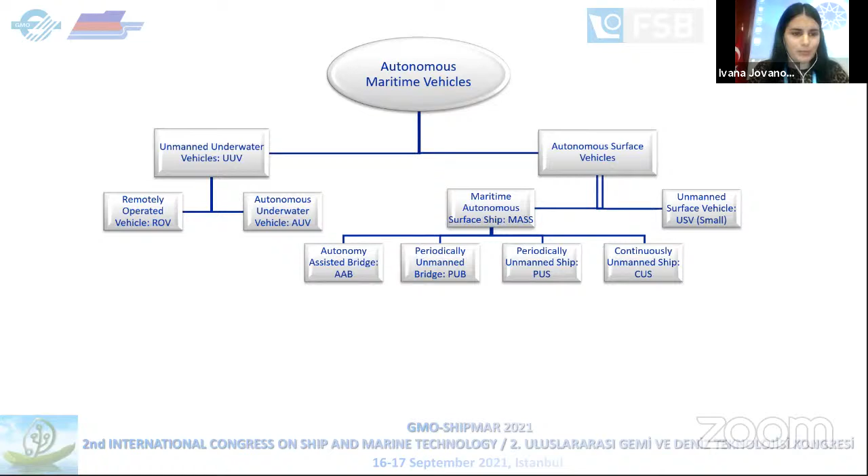Autonomous maritime vehicles are classified into unmanned underwater vehicles and autonomous surface vehicles. Unmanned underwater vehicles are further divided into remotely operated vehicles and autonomous underwater vehicles. Here we see an example of an autonomous underwater vehicle used for oil platform inspections. Autonomous surface vehicles are divided into maritime autonomous surface ships and unmanned surface vehicles. Here is an unmanned surface vehicle used as a research platform.

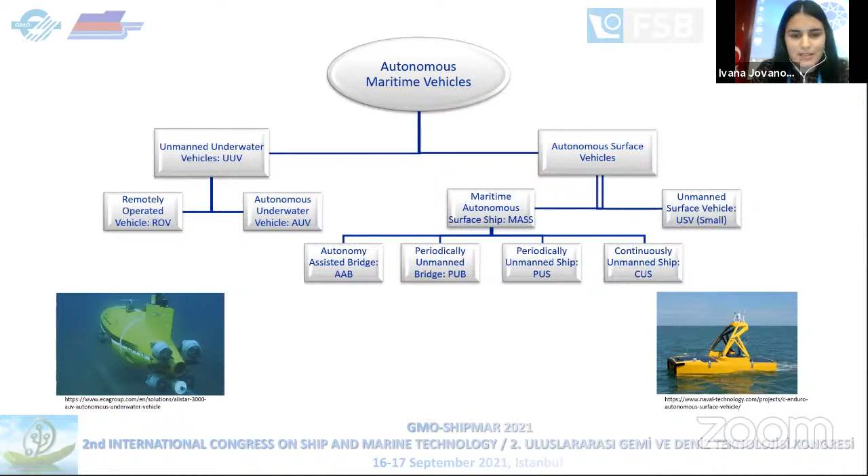Maritime autonomous surface ships is commonly used as the term for autonomous ship, and it is further divided into autonomy-assisted bridge, periodically unmanned bridge, periodically unmanned ship, and continuously unmanned ship. Here is a picture of Yara Birkeland, a fully autonomous and fully electric ship built in Norway.

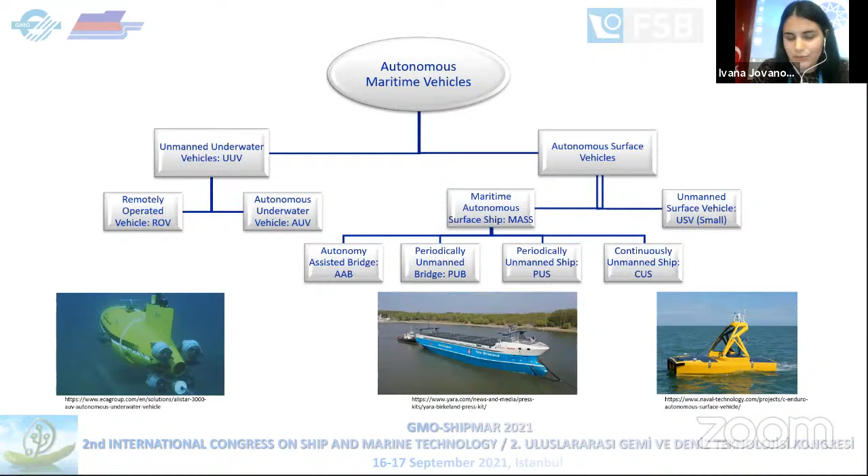The driving force for the development of unmanned and autonomous ships lies within the opportunity of cost savings by fuel reduction and lowering operating and voyage costs; safer waterborne transport by eliminating human error, which is responsible for more than 60% of maritime accidents; greener shipping by reducing fuel consumption and enabling implementation of renewable energy sources and alternative fuels; a more competitive industry through opportunity to grow in size and volume; and new personnel ashore by creating engaging and exciting maritime jobs.

The International Maritime Organization has recently defined 4 autonomy degrees for maritime autonomous surface ships. First degree are ships with automated processes and decision support, where seafarers are on board to operate and control shipboard systems and functions.

Degrees 2 and 3 are remotely controlled ships from a shore control center. In degree 2 ships, crew are still on board, ready to take action if needed, but in degree 3 ships there is no crew on board. Degree 4 is a fully autonomous ship, which has an operating system able to make decisions and determine actions by itself.

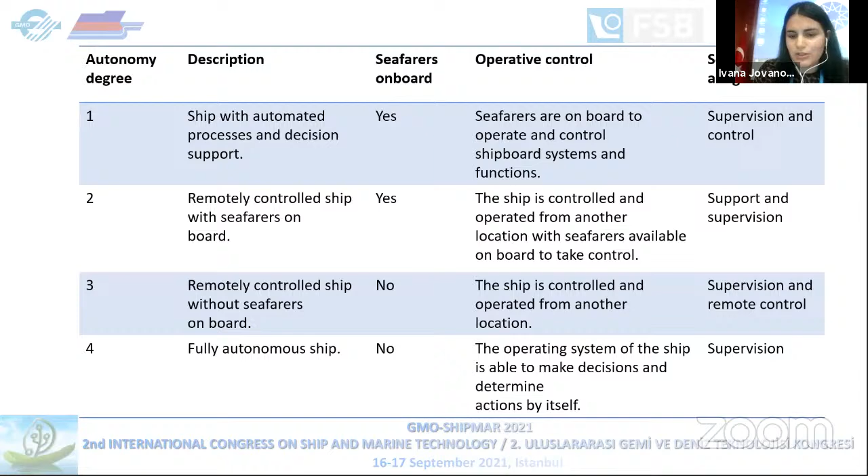A crucial part of every autonomous ship is the guidance, navigation, and control system, as well as a variety of sensors that enable situational awareness. Reliable communication is also crucial. Depending on size and usage, it can be an internet connection, antenna, or satellite. Also needed is a ground station, which depending on size and usage can be a mobile device, laptop, another ship, or in the case of a merchant autonomous vessel, a shore control center.

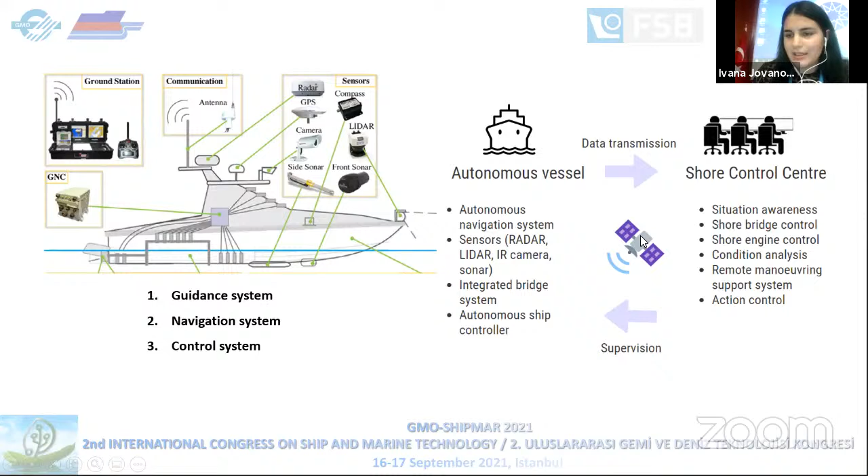Here we can see the relationship between the autonomous vessel and the shore control center. The autonomous vessel transmits data through satellite, and the shore control center offers supervision and support.

In this study, a cost model is used. Ship costs are divided into capital costs, related to ship purchase; operating costs, related to crew number, wages, storage, insurance, and administration; and voyage costs, which depend on the typical route. These costs are related to fuel consumption, fuel price, speed, canal dues, port charges, and emission costs.

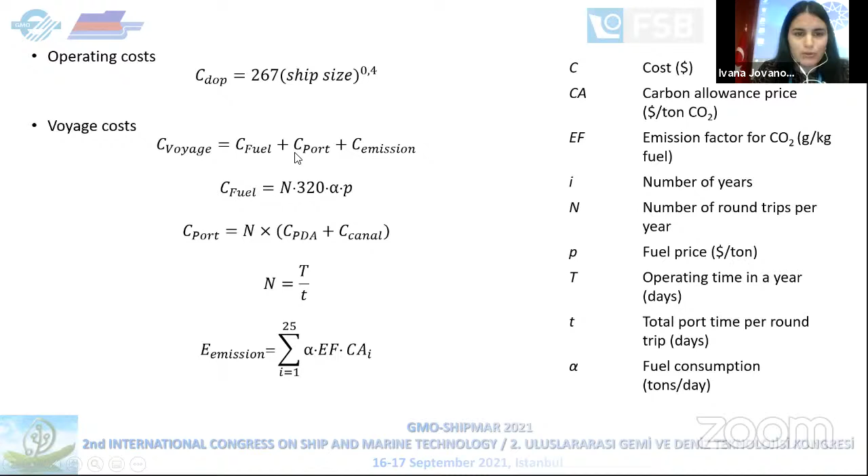Here we can see the equations used for calculating all costs. Daily operating costs are calculated in relation to ship size, and voyage costs are divided into fuel costs, port costs, and emission costs.

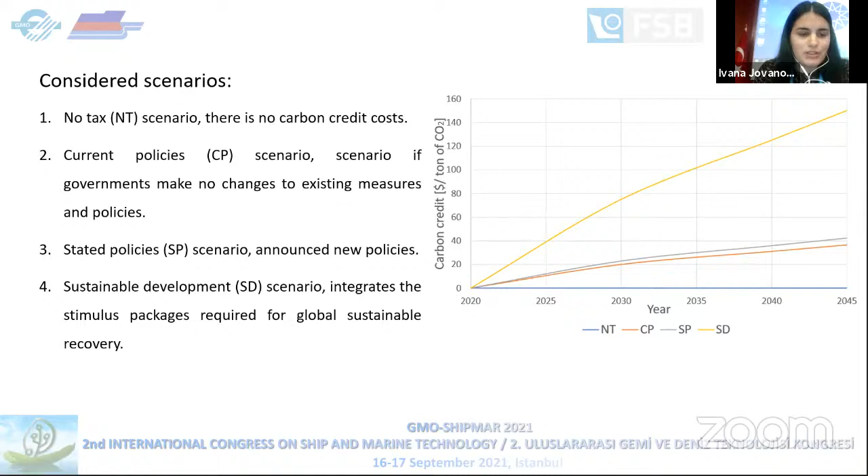In this study, emission costs are calculated for 4 different scenarios. The first is a no-tax scenario. The second is a current policy scenario. The third is a stated policy scenario, and the fourth is a sustainable development scenario, which is required for global sustainable recovery.

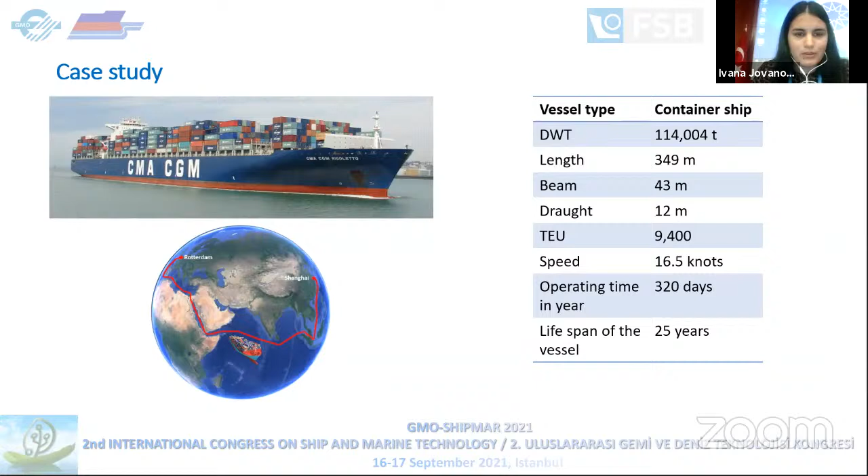In this case study, a container vessel is used. Costs are calculated for a specific route from Rotterdam to Shanghai. The operating time of this ship is 320 days a year, and costs are calculated for a lifespan of 25 years. Firstly, costs are calculated for a conventional container vessel, and then, using research from the European project MUNIN, costs are calculated for an autonomous container vessel. It is assumed that the autonomous vessel is as safe as the conventional one.

Here we can see the results. Here is a diagram of daily cost per container for all 4 scenarios: the first is for conventional, then next to it is for autonomous ship. It can be seen that in all 4 cases, autonomous ship has lower costs, with the most savings for the sustainable development scenario.

Here is sensitivity analysis also, which shows that fuel costs influence total costs the most.

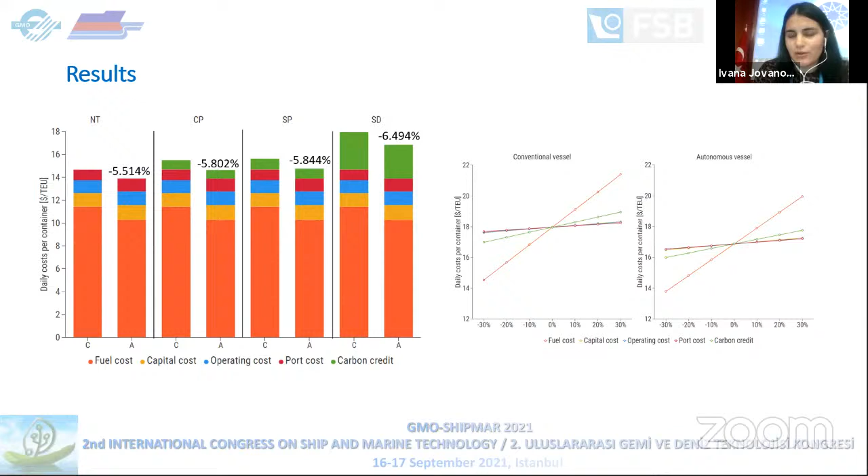In conclusion, with stricter emission tax scenarios, the difference in cost between a conventional and autonomous vessel becomes more significant. Economies of scale occur in daily costs per container. Autonomous vessels have lower fuel consumption, resulting in lower fuel and emission costs. Operating costs decrease in autonomous shipping, and port and capital costs increase, but total costs are lower for autonomous vessels.

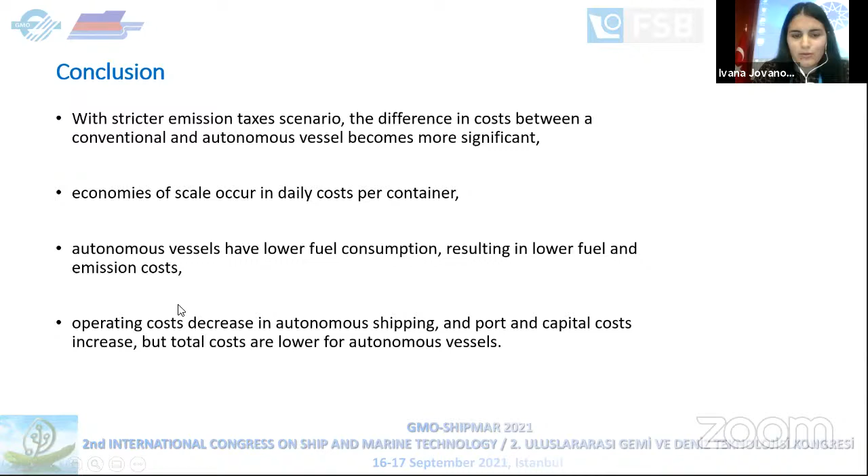Thank you for your attention, and I'm happy to answer your questions.

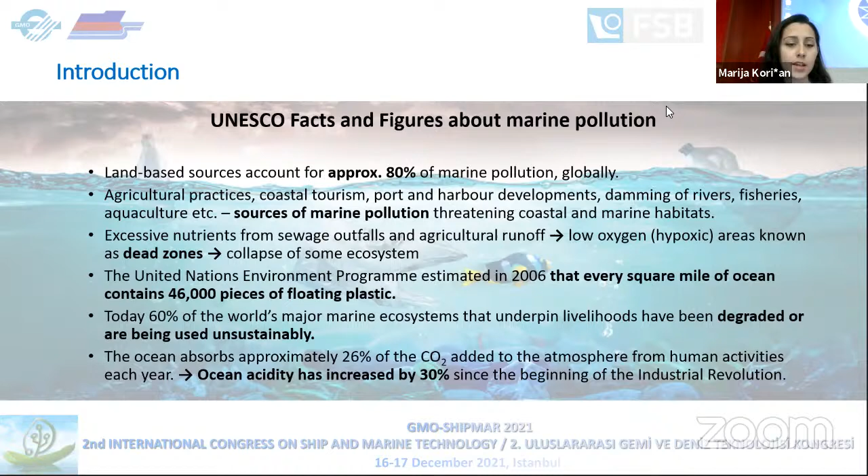The United Nations Environment Program estimated in 2006 that every square mile of ocean contains 46,000 pieces of floating plastic. Today, 60% of the world's major marine ecosystems have been degraded or are being used unsustainably. The ocean absorbs approximately 26% of the CO2 added to the atmosphere from human activities each year, and this causes an increase in ocean acidity by 30%.

There are different types of marine pollution issues. Microplastics are the most mentioned one in the general public; they are harmful for marine organisms, causing problems in the digestive tracts and altering feeding behavior, reducing growth and reproduction. Different chemical anomalies from toxic waste and dissolution of chemical compounds, such as from antifouling paints, fishing nets, and biocides, enter the food chain and can directly affect human health and result in human casualties.

Major oil spills are a rare event nowadays, but when released, they cause great environmental disasters. Thanks to a variety of technological and regulatory prevention measures, there is a significant reduction in spillage, but the risk of significant damage remains. Atmospheric emissions are a highly investigated pollution problem, especially in land transport. The emissions are mainly nitrogen oxides, sulfur oxides, and carbon oxides that the ocean absorbs, resulting in an increase of acidification level and global warming.

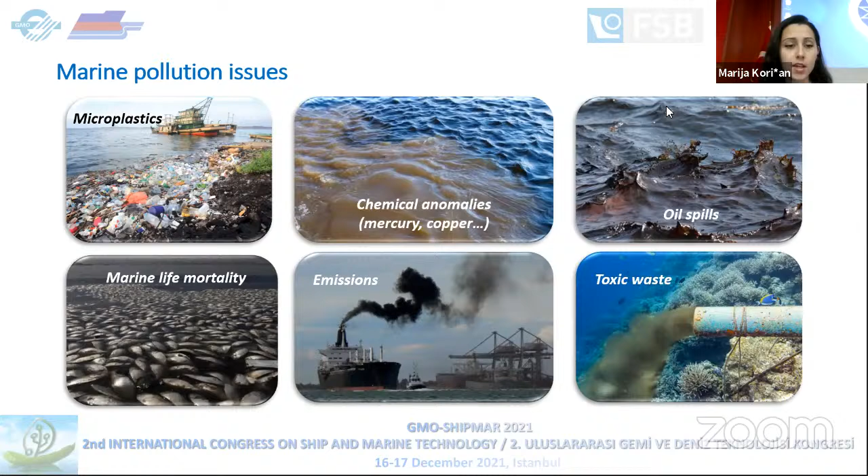The pollutants affect the marine ecosystem. By raising the level of nutrients such as nitrogen and phosphorus, the ecosystem is endangered by triggering algae bloom. Overgrowth of the algae consumes oxygen and depletes the supply needed for a healthy marine life. As a result, the mortality of marine organisms rises and dead zones occur.

Because of that, there are many programs in Europe and worldwide that deal with the problem of marine pollution. The Interreg Europe program is created to help regional and local governments across Europe achieve their economic, social, and environmental potential. The main goal is to connect European countries to exchange knowledge and experience, and therefore improve policy in Europe.

The Interreg Adrion program is a European transnational program that works to promote cooperation and solidarity between 8 partner states: Albania, Bosnia and Herzegovina, Croatia, Greece, Italy, Montenegro, Serbia, and Slovenia. The Adrion program encourages and invests in regional innovation systems, culture and natural heritage, environmental resilience, and sustainable transport and mobility.

The SEAVIEWS project stands for the sector-adaptive virtual early warning system for marine pollution and brings together 6 countries in the Adriatic-Ionian area: Greece as the lead partner, Italy, Croatia, Slovenia, Montenegro, and Albania. The SEAVIEWS project is a transnational project aimed at tackling environmental vulnerability and preserving the ecosystem in the Adriatic-Ionian area. By collecting real-time data from a scientific database collected from sensors and a general public database collected by the

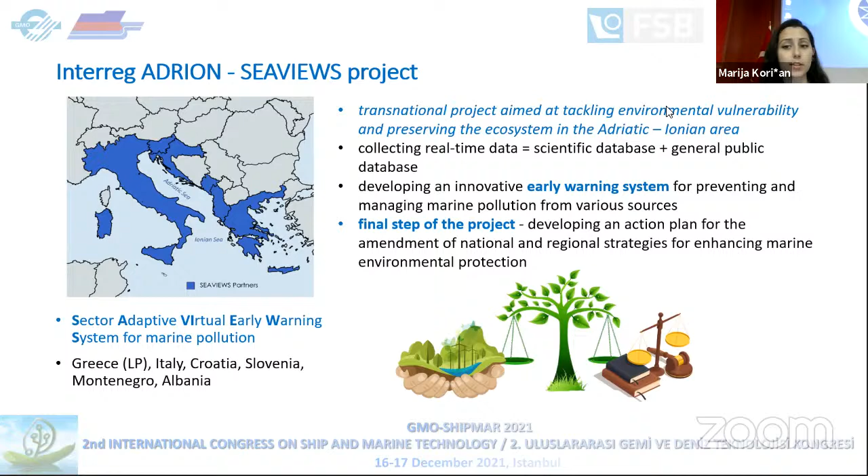SEAVIEWS mobile application, an early warning system will be developed for preventing and managing marine pollution from various sources. The final step of the project is developing an action plan for the amendment of national and regional strategies for enhancing marine and environmental protection.

The SEAVIEWS project has several aims. The first aim is to provide detailed monitoring for water quality within locations with installed sensors covering a wide range in the ADRION area. The next aim is to establish a transnational repository network that will include smart sensors, the mobile application, database and servers, control room, and the SEAVIEWS platform itself.

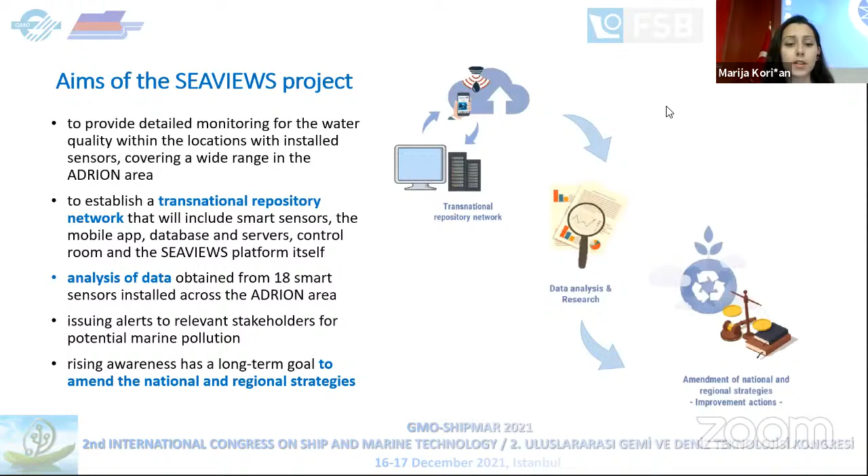The data obtained from 18 smart sensors installed across the ADRION area will be analyzed, and it will be used to issue alerts to relevant stakeholders for potential marine pollution. By raising awareness, the project has a long-term goal to amend national and regional strategies.

The multi-parameter probe that will be installed in all 6 partner countries will hold 6 to 9 ports. One port is reserved for the automatic system that cleans the surface periodically, preventing fouling.

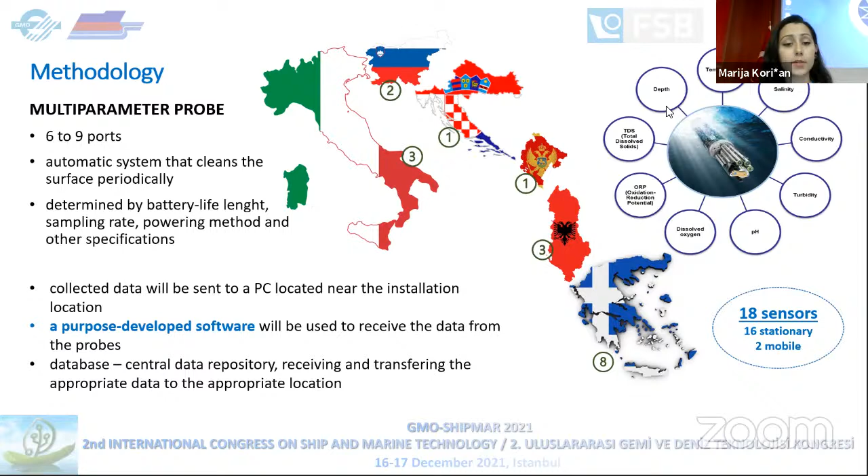A purpose-developed software will be used to receive the data from the probes, and a database will serve as a central data repository, receiving and transferring the appropriate data to the appropriate location.

The developed web-based platform will be a foundation for the development of an early warning system that will be used for issuing real-time alerts in case of marine pollution incidents.

The early warning algorithm will be based on normal, abnormal, and reference values. It will be used to recognize unusual patterns in the parameter value distribution from existing data. A machine learning algorithm will be used to make marine pollution predictions and issue early warning alerts.

The SEAVIEWS mobile application will allow the general public to take pictures of potential marine pollution issues with the correct GPS location and timestamp and a detailed description of the possible issue. The data will be sent to the SEAVIEWS platform for further analysis, but photos sent by public users will be checked and validated prior to uploading.

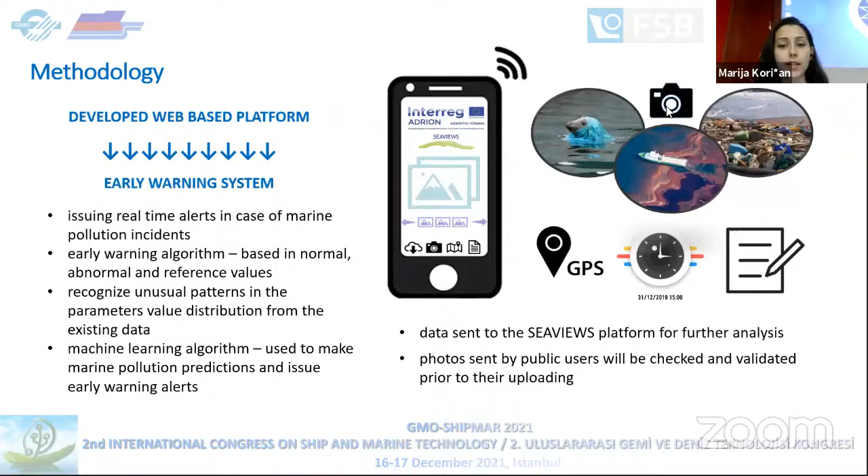The Croatian coastline occupies most of the eastern Adriatic shoreline, which makes it valuable for this project. The Adriatic Sea is relatively shallow and is characterized by the Dalmatian type of shoreline. There are 5 main rivers draining towards the Adriatic Sea: Neretva, Lika, Zrmanja, Krka, and Cetina, because of which the salinity of the sea is slightly lower.

There are different sectors currently in progress: aquaculture, fishing, tourism, and transport, and they all affect the Adriatic Sea. The SEAVIEWS study location is the mouth of the Krka River near Šibenik.

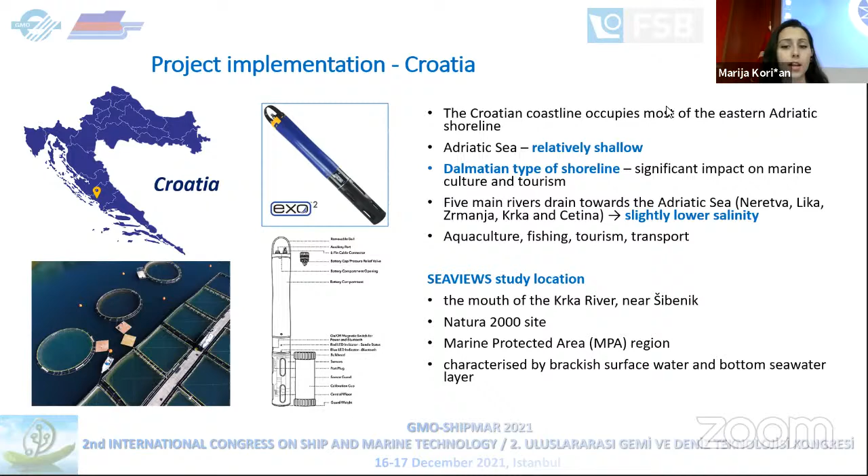This is a Natura 2000 site and a marine protected area, characterized by brackish surface water and a bottom seawater layer. There are several reasons for choosing an aquaculture farm in the Krka estuary for the SEAVIEWS study area. First, the low salinity is not tolerable for mussels and fish, and mortality can occur.

Also, increased copper concentration can be harmful for mussel embryos as well as for fish. And at the end, monitoring of water quality is essential for the growth and reproduction of species.

In Croatia, we have installed one multi-parameter probe, and we have chosen the EXO2 probe by YSI. The study location incorporates a small platform with electricity, and it's protected by a roof, which eliminates the problem of bad weather.

The aquaculture farm and the platform are permanently protected by a guard person. Nearby is the marine station, which is used as logistic support. All the areas are well connected and easily approachable by a research vessel.

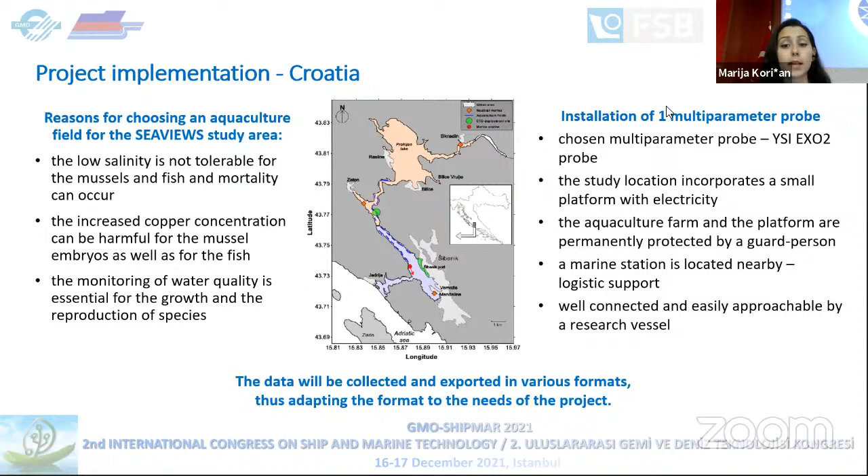Data will be collected and exported in various formats, adapting the format to the needs of the project. In overview, the project plan that includes the technical and promotional part of the project has been set up.

Most of the sensors are installed. A few partners are still waiting, but the network of sensors was already established. The data collecting is in progress, and the first results are being analyzed. The SEAVIEWS platform is being developed, also with the SEAVIEWS mobile application.

Regarding the improvement actions, data from different national and regional locations is being gathered to raise general awareness and enhance marine environmental protection. That will be all for me. If there are any questions, please don't hesitate.

Thank you, Marija, for your nice presentation. It's a well-organized presentation and a nice project. I just want to ask a question: when did this project start?

It started in April 2020. And when will it be finalized? The first deadline is October 2022, but because of COVID and everything, it will probably be delayed for about 8 months.

Ah, okay, I see. Any other questions? No, I think. Okay, if you have questions, then we can also answer at the end of the session. So, thank you again, Marija, for your presentation.

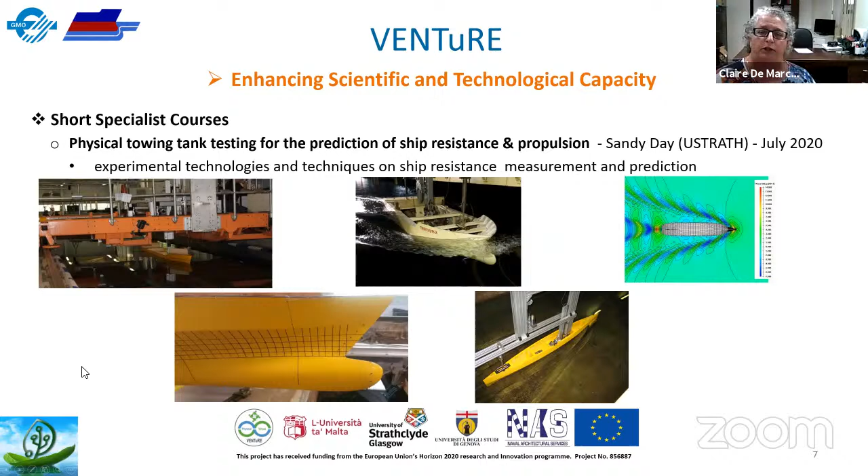Obviously, physical means experimental technologies and techniques, and we are focusing on ship resistance measurements and prediction in this particular short specialist course. The second short specialist course, which has just taken place, is the virtual aspects of the physical course we had last year. So it's talking about theories, numerical methods, and during the course we had tutorials of lots of different examples on how to virtually predict the ship resistance and propulsion.

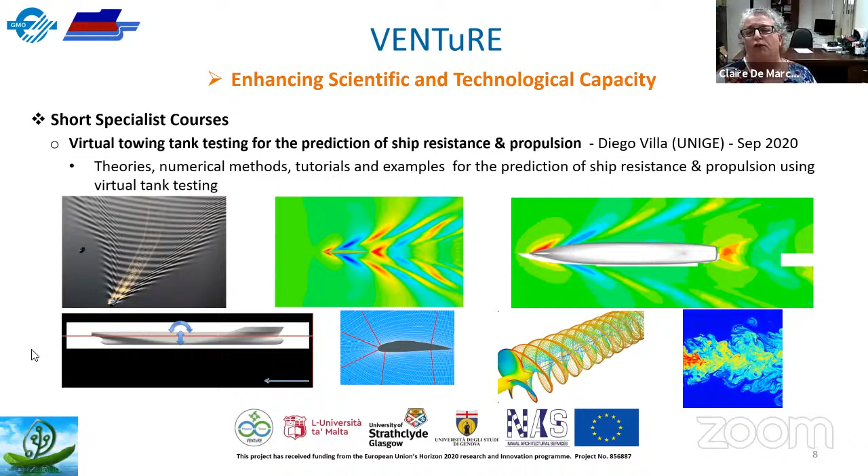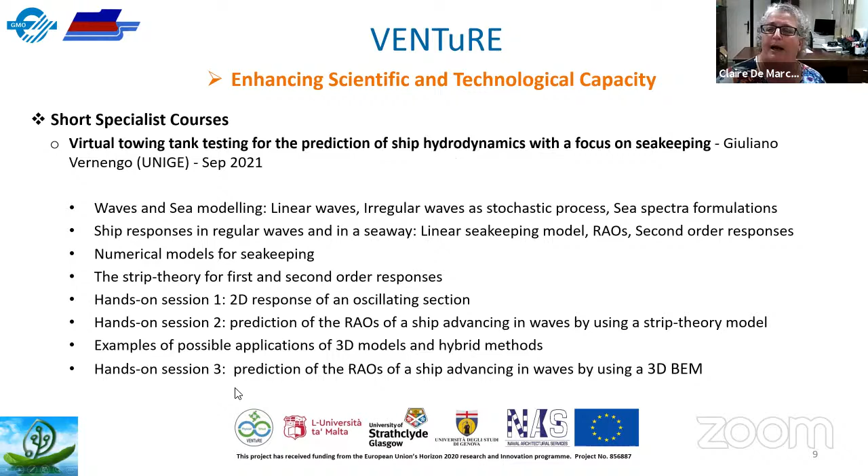Here we have a couple of snippets from the courses themselves. We have one coming up right now, perhaps next week, held in Genoa, led by the University of Genoa, about virtual tow tank testing prediction of ship hydrodynamics, focusing on seakeeping. We're looking at the modeling, numerical methods and models, and we'll have hands-on examples, tutorials and demonstrations on the virtual aspects of ship hydrodynamics. In fact, we have 6 in total.

The virtual hydrodynamics course came before the physical one, and University of Strathclyde is going to lead this physical short specialist course. We then have 2 further: the state-of-the-art measurement, calibration, and data analysis techniques, and finally a final school on virtual towing tank applications after we've learned these applications in the marine industry, led by the Maltese industrial partner, Naval Architectural Services.

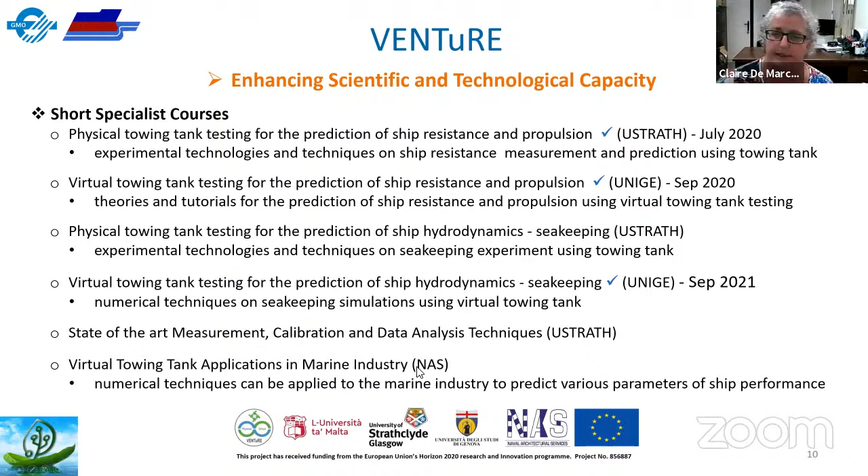We also have short-term visits. Unfortunately, this was exactly when COVID hit, and instead of actually visiting the University of Strathclyde, we had an online visit led by Edinburgh Designs. Everybody who deals with tow tanks has heard about Edinburgh Designs, and we had a very enjoyable 3 days on how to design and spec a towing tank. Why do we want to design and spec a towing tank?

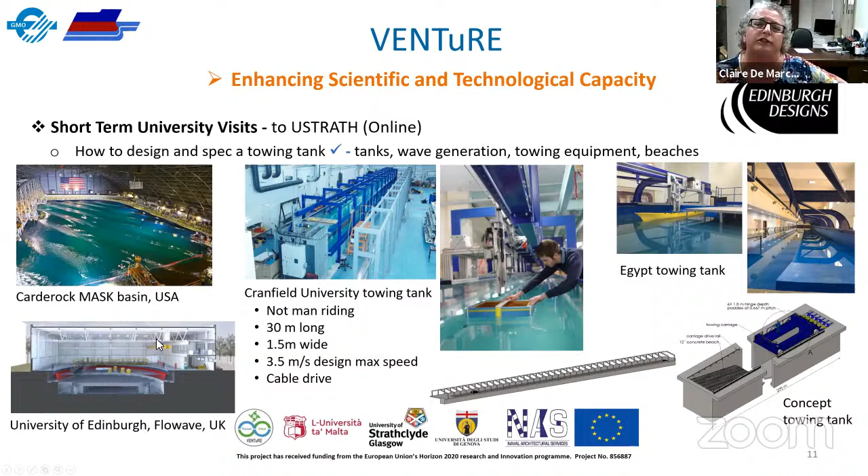Because the University of Malta is in fact investing in its own towing tank. Amongst the many towing tanks that we looked at during this course, one of particular interest was Cranfield University, simply because what we are designing is roughly the same specifications: about 30 meters long, 1.5 meters wide, about 2 meters deep as well, for about the same design maximum speed. So that was a very interesting 3-day short-term visit, if you wish.

As you can see, we have perhaps 3 other visits as well. Next week we are going to Genoa to see how to operate and use towing tanks as academic, education, and industrial tools, to see how Genoa will do this. And then we have 2 other visits: one about the cavitation tunnel, again to Genoa, and another at Strathclyde on how to combine CFD with EFD.

We also have, as one of our visits, a partner industrial visit. Basically NAS is our industrial partner in Malta, and we had the first visit where they showcased all the activities and services they carry out in the company, and also highlighted the different sectors and work within the maritime industry within Malta, where we had a lot of researchers following this very interesting partner industrial visit to see where they can also work in Malta and perhaps further afield.

We have due some experts visits where we'll have visitors coming to the University of Malta, and our technician and lab staff visits unfortunately could not take place because of all the travel restrictions, and we hope that eventually very soon this will start up and run.

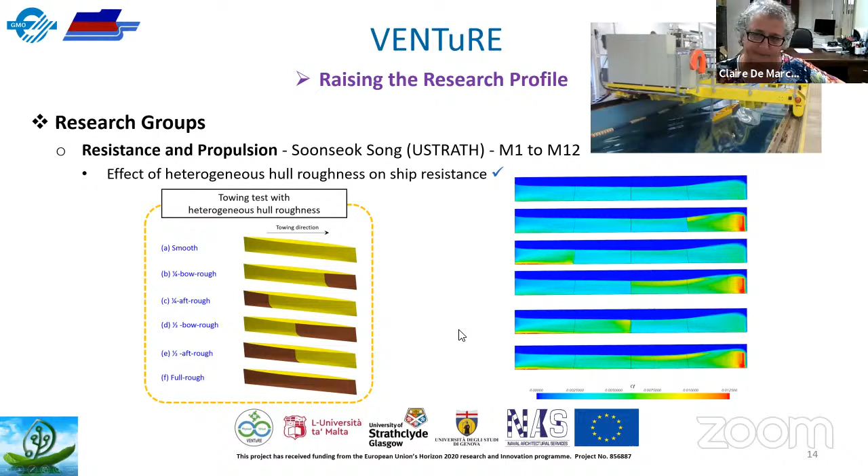So moving on, how are we going to raise the research profile of the University of Malta and all the other universities? We have created 3 different research groups, and each research group is to produce a case study every year. The first resistance and propulsion group, in the first year, looked at hull roughness on ship resistance, investigating a heterogeneous hull with experimental results compared with CFD. The second case study of this group, currently running, is the numerical and experimental work following ITTC guidelines to predict high-speed craft in self-propulsion condition, discussing resistance tests, experimental and numerical, open water propeller tests, experimental and numerical, and propulsion tests.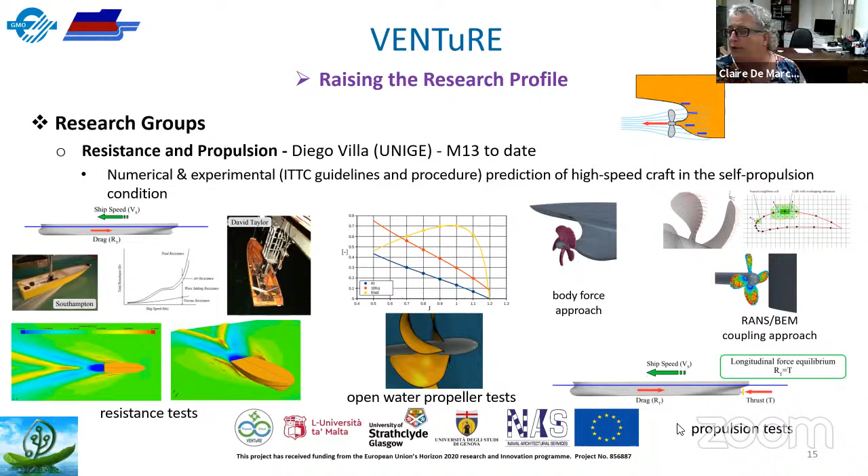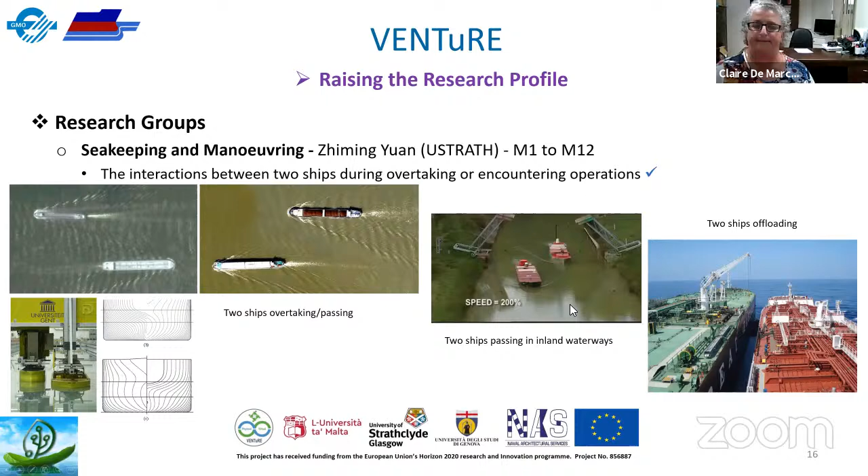The next research group is seakeeping and maneuvering. The first case study looked at the interactions between 2 ships during an overtaking maneuver or an encountering operation, both in open sea and even in inland waterways. The second case study for this group is to investigate the effects of hull, propeller, rudder interactions. It's a classical research topic for ships and for academic institutions.

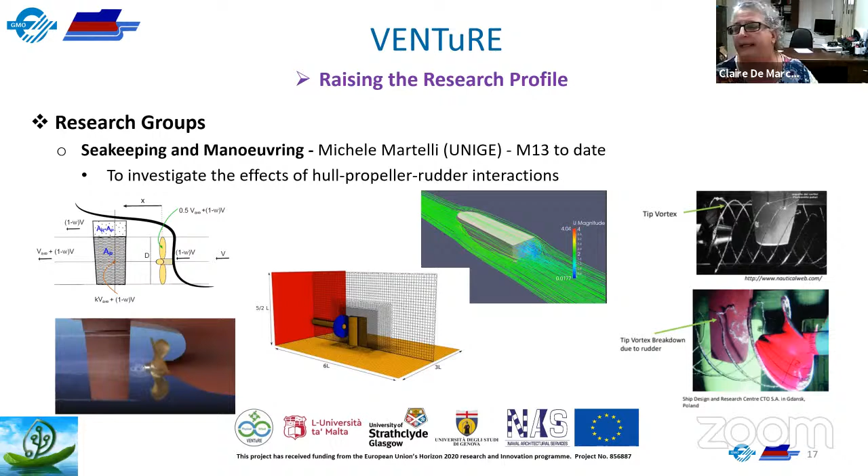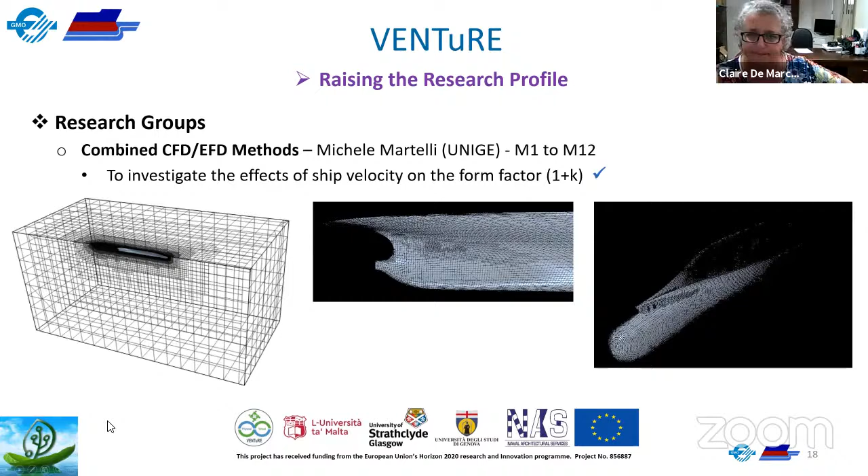The third group is the combined CFD and EFD methods. The first case study investigated the effects of ship velocity on form factor through numerical methods and simulation. The second case study of this group is the analysis of propellers in oblique flow, looking at bearing forces with and without cavitation.

So this is presently looking at the computational side, and seeing how we're going to convert all these forces and the motion over the propeller experimentally. Here you can see the ideas of the cavitation and the simulation model.

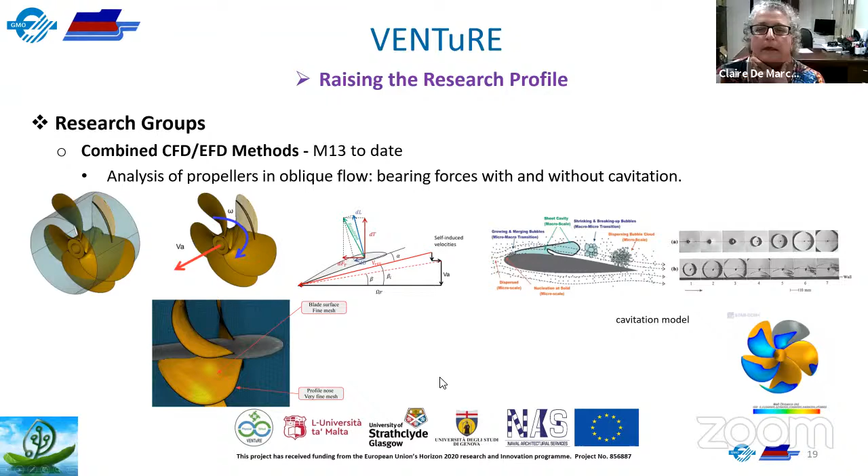One way of raising the research profile is to publish very early on, when the project just started, before we even heard the word COVID, probably. We had the whole consortium in Malta, and Professor Tezdogan from the University of Strathclyde gave us a very good seminar on how to get published.

To raise a research profile, we have annual postgraduate seminars. We have joint proposal strategies with Genoa, with Strathclyde, with NAS. We have applied for funding through Transport Malta and Malta Marittima, and we have been awarded the MARSA funds for 2 projects.

We have also won, in Malta, the national contact point of the Horizon 2020 program award - it's not an annual thing - for H2020 projects with outstanding potential and capabilities, and the venture project won this award.

We also want to look for regional funding in Italy, and there's a SeaFuture event next week where we are going to discuss a lot of regional and international funding, Horizon Europe. So we are looking for partners for Horizon Europe - we're going to network for possible partners for joint doctoral programs, the Horizon Europe standard joint doctoral program.

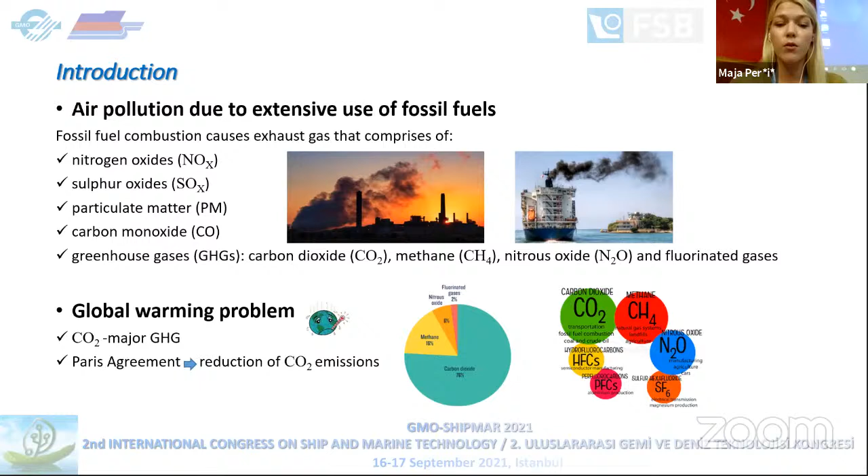According to this Paris Agreement, each sector should participate in its decarbonization. So the International Maritime Organization set a new goal for international shipping to reduce its annual greenhouse gas emissions by at least 50% by 2050, compared to 2008 levels.

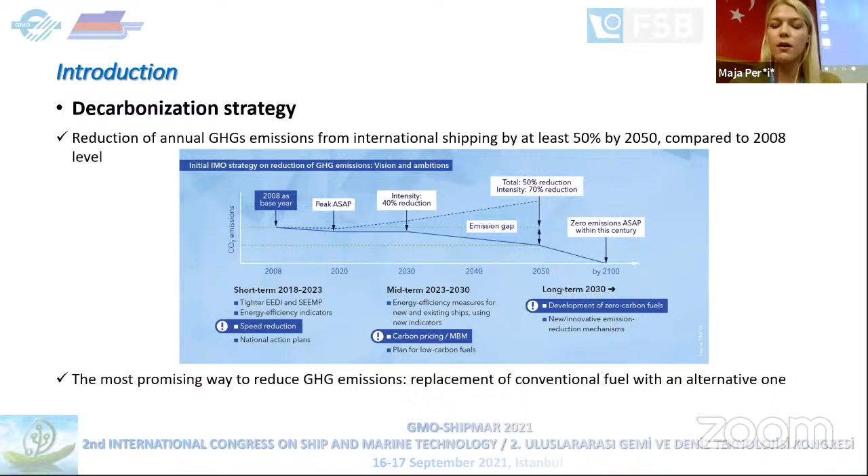The most promising way to reduce greenhouse gas emission is to replace conventional fuel with alternative fuel, preferably with zero carbon content, but it's okay if it's lower carbon content. Among different fuels investigated for use in the shipping sector, methanol is one of them.

Methanol is a sulfur-free fuel with low carbon content. Its lower carbon content leads to lower released greenhouse gas emissions. Methanol has a carbon content around 38%, while for comparison, diesel has a carbon content around 87%. So there is a great difference in the released emissions.

Methanol can be produced from various sources, either fossil methanol or biomethanol. Fossil methanol can be produced from fossil fuel, either natural gas or coal, and it's an available and affordable fuel, but it's still fossil fuel. On the other hand, we have biomethanol.

Biomethanol is produced from biomass, and it is a biofuel, which is usually considered a carbon neutral fuel, but its main limitation is that it is expensive and the distribution chains are not so developed.

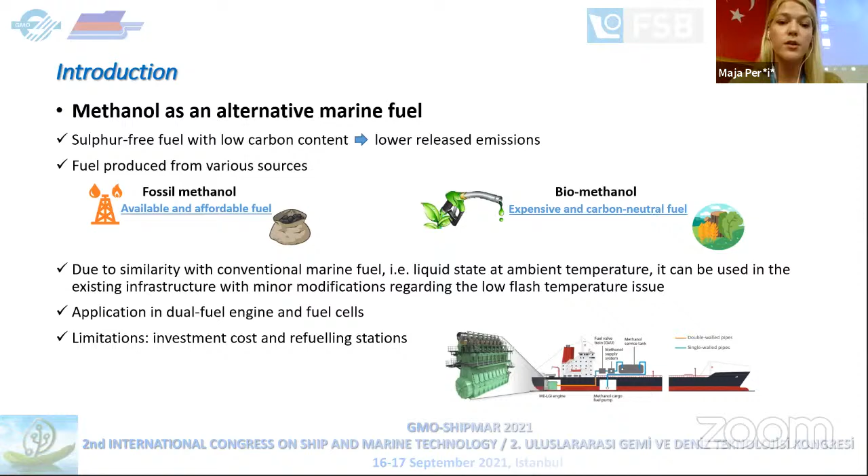Due to similarity with conventional marine fuel, methanol can be used in existing infrastructure with just minor modifications regarding low flash temperature. While it can be used in commercially available dual fuel engines, methanol can also be used as a hydrogen carrier in fuel cell systems.

In this paper, several methanol types as potential marine fuels are investigated depending on the methanol origin, whether it's fossil methanol or biomethanol. The fossil methanol is produced from natural gas, while there are 6 different types of biomethanol, produced from willow, switchgrass, forest residue, corn stover, miscanthus, and poplar.

The life cycle assessment comparison of the total greenhouse gases, NOx and SOx emissions related to the considered fuels, where the currently used diesel-powered ship represents a baseline scenario, and the results of the analysis are illustrated on a ship engaged in the Croatian short sea shipping sector.

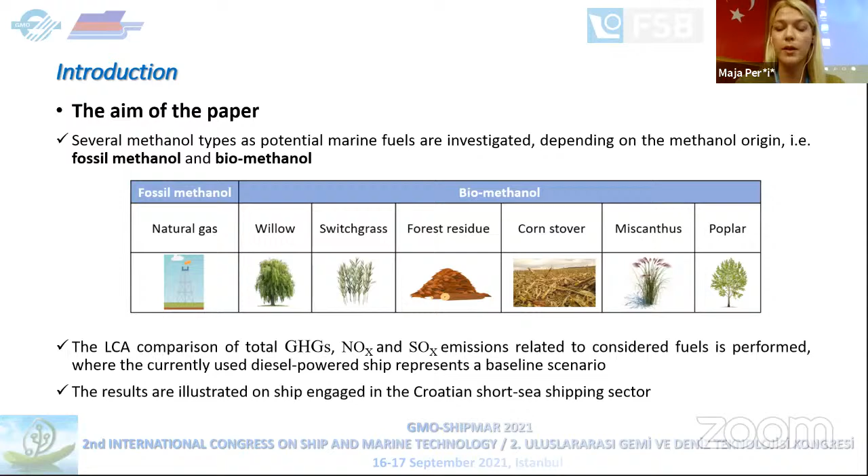The environmental impact of these different types of methanol implemented on board are investigated, where the selected ship is a Ro-Ro passenger ship, i.e. a ferry, that is engaged in the Croatian short sea shipping fleet.

On the left side of this slide, the methodology flow is presented. In the first step, there is a ship schedule analysis, which leads to average speed calculation. The next step of the methodology is energy needs analysis, which leads to energy consumption calculation.

The energy consumption calculation represents an input parameter for our life cycle assessment software, which is GREET 2020. After that, the life cycle assessment of diesel and life cycle assessment of different types of methanol are performed, and in the final step of the methodology, they are compared.

On the right side of the slide, the representative ship of the Croatian short sea shipping fleet is presented. This ferry operates between 2 settlements, Ploče and Trpanj, and it represents a good candidate for implementation of alternative fuels such as methanol, due to the proximity of land, required energy, and the length of the route.

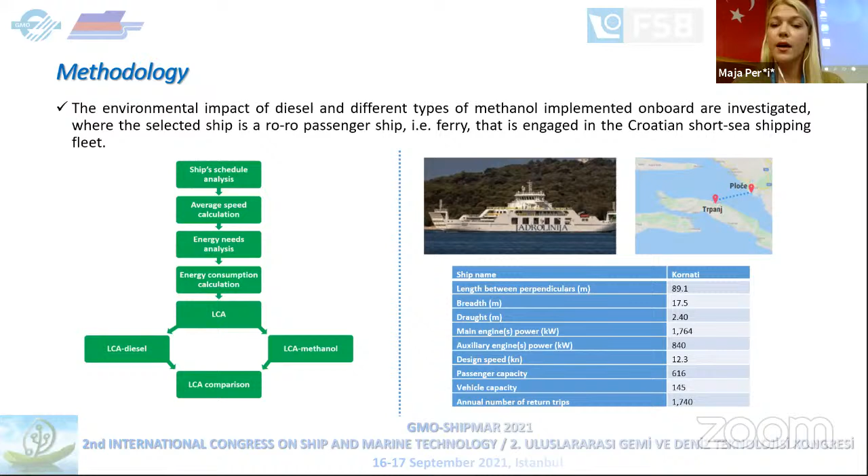Environmental analysis is performed with life cycle assessment using LCA software GREET 2020. This environmental assessment considers emissions released through the life cycle of a ship power system, where these emissions can be arranged into 3 phases. The first phase is well-to-pump, which refers to emissions related to the fuel cycle.

It includes processes from raw material extraction to transportation of raw material to the production facility, production of fuel, and finally distribution of that fuel to the refueling station.

The second phase is pump-to-wake, which refers to emissions related to the use of fuel in the ship power system, often referring to fuel combustion in a ship engine during operation. The third phase is the manufacturing phase, where emissions are related to manufacturing the main elements of a power system, for example a diesel engine, battery, fuel cell, and so on.

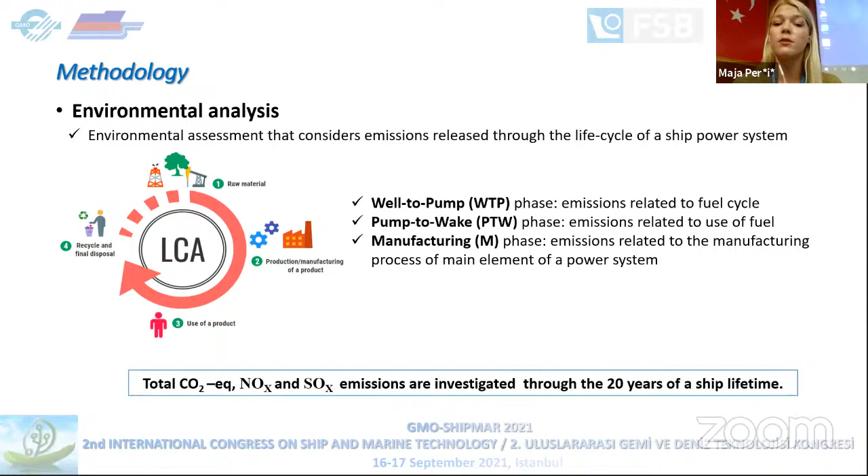In this paper, total CO2 equivalent emissions, NOx, and SOx emissions are investigated over a 20 year ship lifetime.

In the life cycle assessment of a diesel-powered ship, the processes included are diesel engine manufacturing, crude oil recovery, crude oil transport, diesel production, diesel distribution, and finally combustion of diesel.

In the life cycle assessment of a methanol-powered ship, along with dual fuel engine manufacturing and combustion of fuel in a ship engine, we have two well-to-pump phases.

The first is from methanol, and the second is from diesel. Since methanol is used in a dual fuel engine, it requires pilot fuel, in this case diesel, to start the combustion. So diesel is used in a small share as pilot fuel.

In the well-to-pump phase of methanol, the processes included are feedstock preparation, methanol production, and methanol distribution.

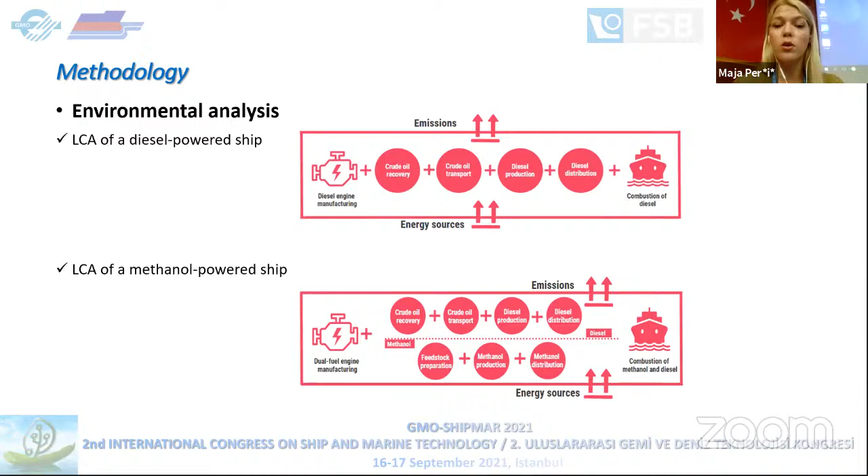The results of the life cycle comparison indicated that even fossil methanol is an environmentally friendly option compared to a diesel-powered ship, and that regarding greenhouse gas emissions, biomethanol represents an even friendlier option than fossil methanol. But regarding NOx and SOx emissions, the comparison shows some types of biomethanol have higher emissions than fossil methanol.

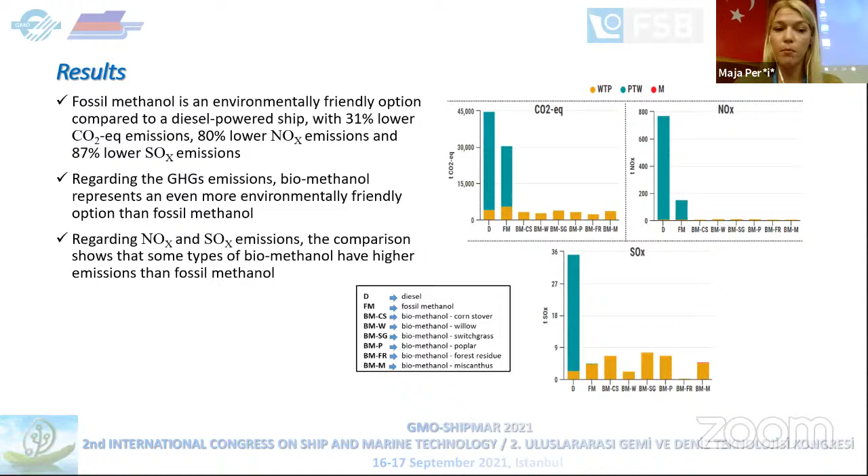Due to that, further analysis is performed where the well-to-pump phases of each type of methanol, including fossil methanol and biomethanols, are compared. This analysis indicated that biomethanol produced from forest residue represents the most ecological option among those analyzed, with its use as ship fuel resulting in lower SOx, NOx, and CO2 equivalent emissions.

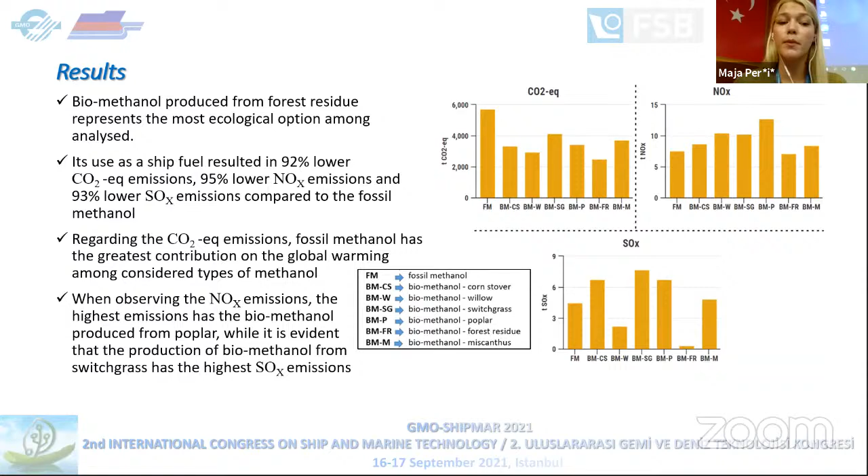Regarding CO2 equivalent emissions, fossil methanol has the greatest contribution to global warming among the considered types of methanol, which is obvious. When observing NOx emissions, the highest is from biomethanol produced from poplar, while it's evident that production of biomethanol from switchgrass has the highest SOx emissions.

In conclusion, methanol is investigated as a marine fuel used in a dual fuel engine on board short sea Croatian ro-ro passenger ships. Along with fossil methanol, 6 different types of biomethanols are investigated, with their environmental impacts compared against the existing power system on board a ship.

The life cycle assessment comparison showed that even fossil methanol is the environmentally friendly option compared to the existing diesel-powered ship, while among different types of methanol, biomethanol produced from forest residue showed the lowest emissions.

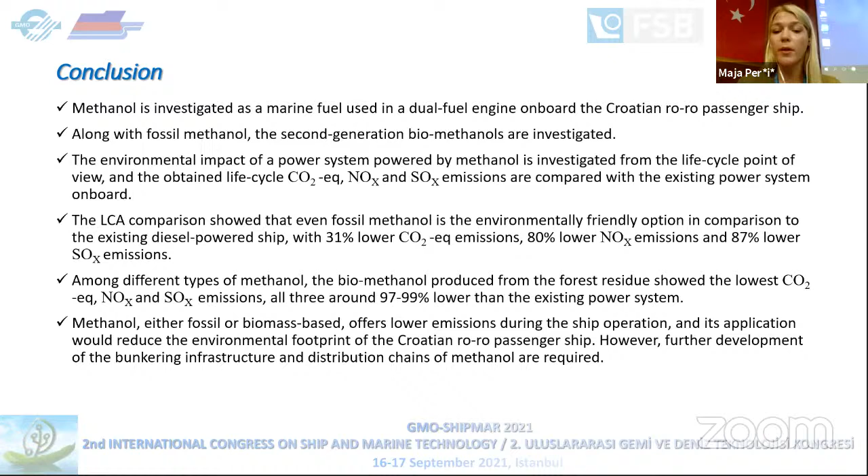Methanol, either fossil or biomethanol, offers lower emissions during ship operation, and it will reduce the environmental footprint of the Croatian ro-ro passenger ship. However, further development of bunkering facilities and distribution chains of methanol are required in the future. Thank you for your attention.